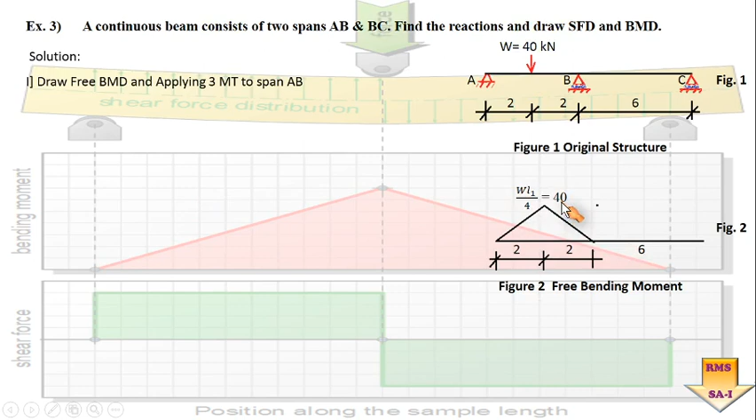Now in figure 2 you can see what we did. We have drawn the free bending moment diagram, in which we know as a standard case, a simply supported beam with a point load at the center has free bending moment equal to WL1 by 4, and putting the values we get bending moment equal to 40 kilonewton meter.

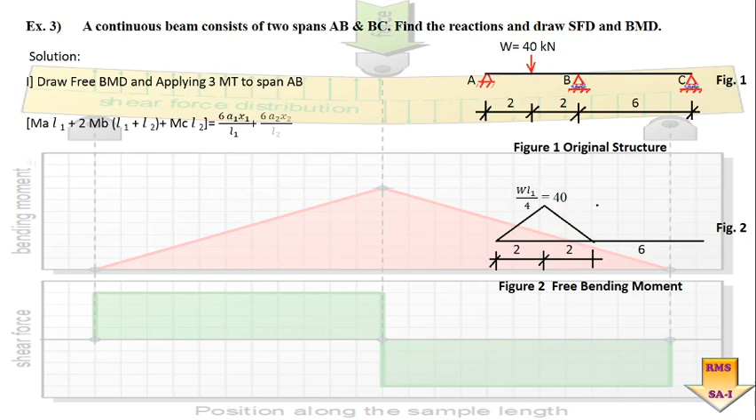Now the first job, as we are dealing with Clapeyron's theorem, is to apply the three moment theorem for these spans. After application we know equation number 4: MA L1 plus 2MB in the bracket L1 plus L2 plus MC L2 is equal to 6A1x1 divided by L1 plus 6A2x2 by L2. Here certain parameters are required such as MA, MB, MC, A1 and x1.

L1 and L2 are already given. We know this being a simply supported continuous beam, the supports are simple supports with a hinge and rollers at B and C. So total reactions: horizontal reaction, vertical reaction at A, one vertical reaction at B, and one vertical reaction at C. So overall there are four unknowns present, making this a statically indeterminate structure.

To find that out, we apply Clapeyron's theorem, which is our governing equation. Now let us work out the various values. MA being a simple support on the extreme end, similarly point C or support C is again an extreme support on the right hand side. Both are simple supports. As far as point B is concerned, there is a partial fixity where there will be certain moment occurring at this particular point. So we conclude that MA and MC should be equal to 0, being extreme and simple supports.

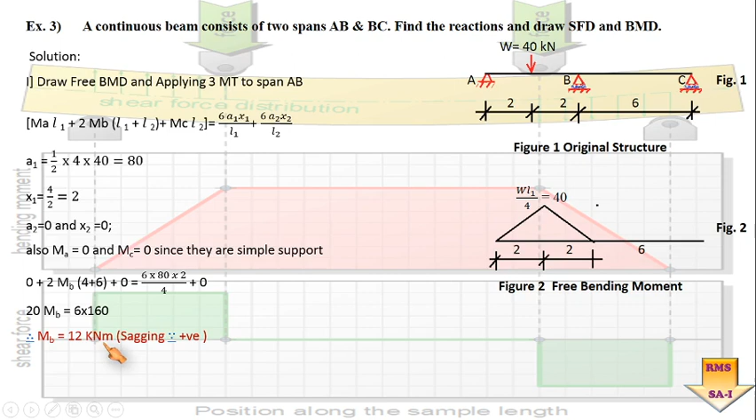Now simplifying that, you will get one unknown, that is MB is equal to 12 kilonewton meter. This is sagging, so it is taken as positive. So this is what we have as the first job.

Moving ahead, the second job is to find out the support reactions, for which we will see the first span AB. Here this is A support and this is B support. By mistake it was shown as B and C, so it is A and B support. So here whatever we know is being shown: MA is equal to 0 and MB is equal to 12, already found out in the earlier slide. RA we don't know, RB also we don't know, and the distances are 2 and 2 from the center.

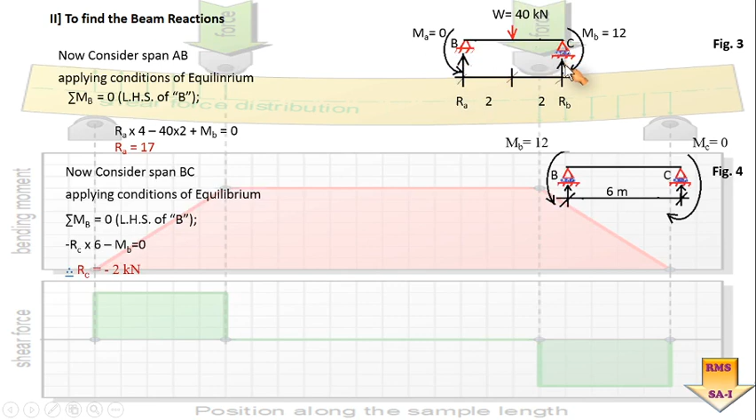Now applying the simple condition of equilibrium, sigma M about point B is equal to 0. Taking a moment about point B: RA into perpendicular distance 4, MA is equal to 0, 40 into 2 plus MB is equal to 0. Putting that in and simplifying, we get RA is equal to 17, because in this figure we can see only one unknown while taking a moment about point B. Similarly, for the second span BC, we are going to do the same.

We are going to take a moment about point B, and whatever we know we are going to take the moment of everything. So MB is already 12, MC is 0. This is what we have, RC.

So RC into perpendicular distance, it is forming anti-clockwise, so minus RC into 6, this equal to 12. It is anti-clockwise, so minus 12, and as far as this MC is concerned, it is equal to 0. So putting all this in this equation, you will be getting an unknown, that is RC equal to minus 2.

So here the answer is coming out to be minus. That means my assumption is wrong. It's not acting vertically upward, it is acting vertically downward. So this is how we have found out the second unknown, RC.

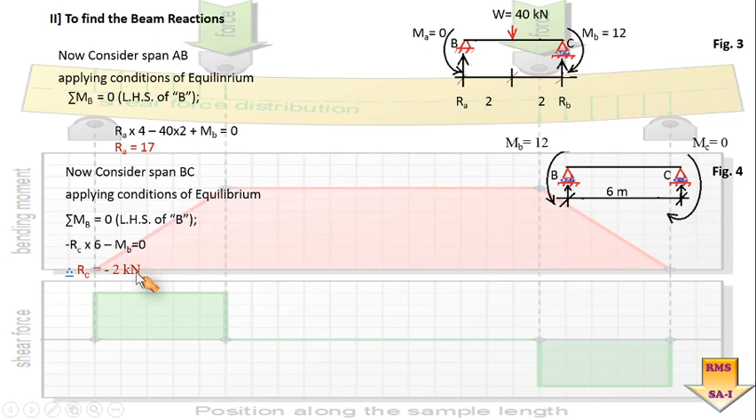So in order to find out the last unknown, RB, now you can see here most of the unknowns have already been found out. Now I can take the whole beam and apply a basic condition of equilibrium, sigma Fy is equal to 0. So plus RA plus RB minus 2, that is minus RC minus 40 is equal to 0. Simplifying that, you will be getting the third unknown, that is RB is equal to 25.

Now here there were three unknowns, RA, RB and RC, all found out in this particular fashion. As far as this horizontal reaction at A is concerned, as there is no horizontal force acting, no unbalanced force acting, or we can say no active force in the horizontal direction, so there is no reactive force in the horizontal direction. So obviously HA is equal to 0.

So this is how we have found out all the unknowns. HA is equal to 0 because no unbalanced force is acting on the beam in the horizontal direction. RA, RB and RC are also found out.

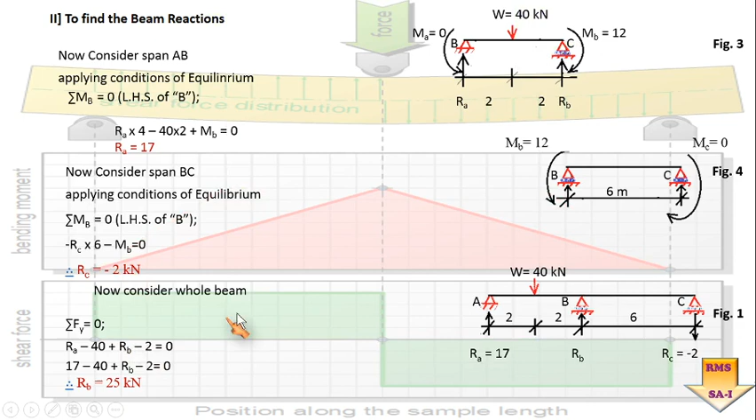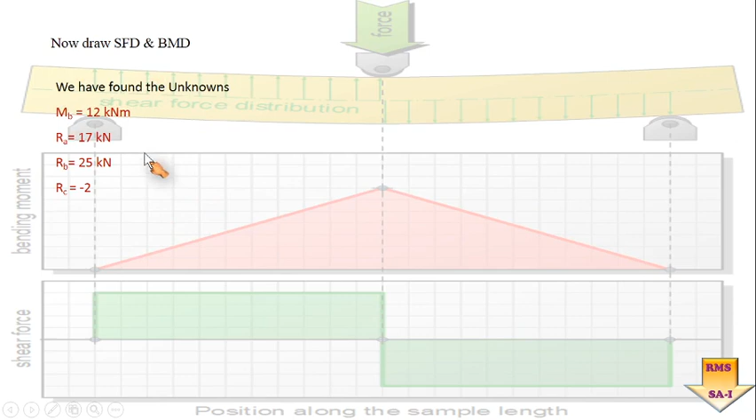Now the third job is to construct the shear force and the bending moment diagram. Here I have compiled all the unknowns which are found out by the analysis of the continuous beam by the application of Clapeyron's theorem. Now let us construct the various diagrams one by one.

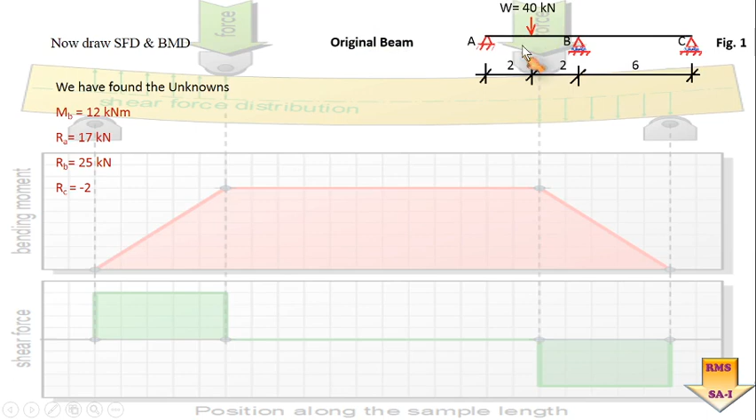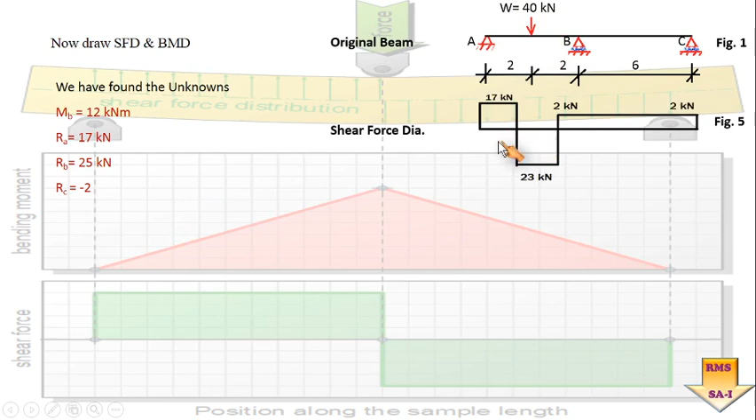So we know this is the original beam. Next diagram we have to construct as usual, what we used to do in the shear force and bending moment diagram. So I have constructed the shear force diagram. Next I have drawn the free bending moment diagram as already shown in the first slide.

Then I have constructed the fixed moment diagram. So here I have shown you MA is equal to 0, MC is equal to 0, and MB is equal to 12.

For span AB as well as for span BC, MB is equal to 12, only with the difference: for span AB it is clockwise, and for the other one, span BC, it is anti-clockwise.

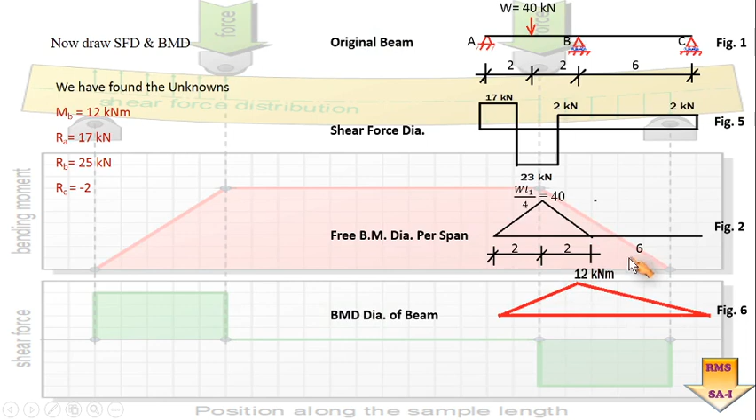So after working out these values, we are still not in a position to get what is the resultant moment. For that resultant moment we have to superimpose the two bending moment diagrams.

So I have superimposed the free bending moment as well as the fixed bending moment diagram, one above the other, and as I have told you earlier, this inclined line will be acting as a new axis, which we have already called the neutral axis, on which the bending moments are 0.

Below that are the negative bending moments and above that are the positive bending moments. So here we can see I have worked out the positive resultant bending moment by simply making the difference between the two. If this is 12 at this end, exactly at the center this will be 6. So ultimately 40 minus 6 is equal to 34 kilonewton meter.

So this is the resultant bending moment acting on this particular beam, which can be further taken for the further analysis or design of that particular continuous beam.

So this is how we have to work out the various unknowns first, then we have to work out the shear force and the bending moment diagram, and then at last we have to superimpose the two bending moment diagrams one above the other, and find out the resultant bending moment acting on that continuous beam.

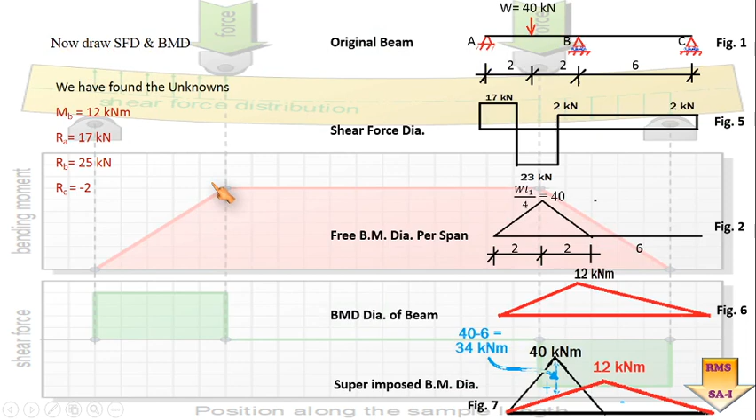So this is the normal procedure to be adopted, may it be any case for any spans. Here we have considered only two spans, it can be n number of spans, but every time we have to consider two consecutive spans. If there are n number of spans, take two consecutive spans at a time and do the same analysis. You will be getting the various unknowns present in that particular system.